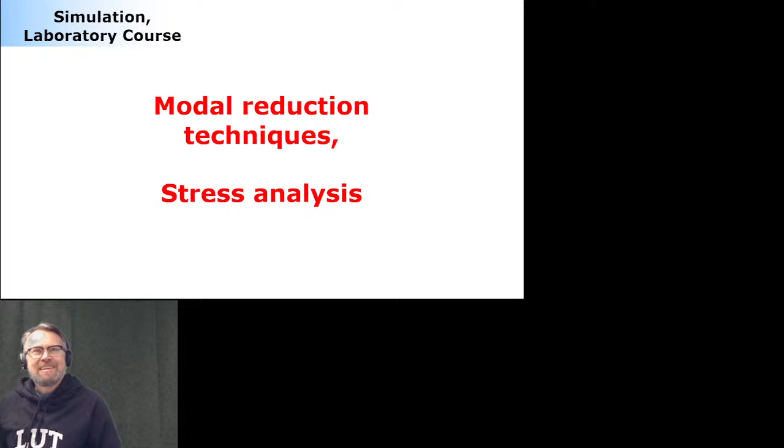It's a name day, it's like Patrick's Day, Saint Patrick's Day, and Saint Aki's Day. Is it? Also, there's another important day today. Today the day and the night are equal in length. Yes, today is the day. So we are approaching the time that the daylight becomes much longer than the night. That's fantastic. The next six months is going to be great. Too much energy.

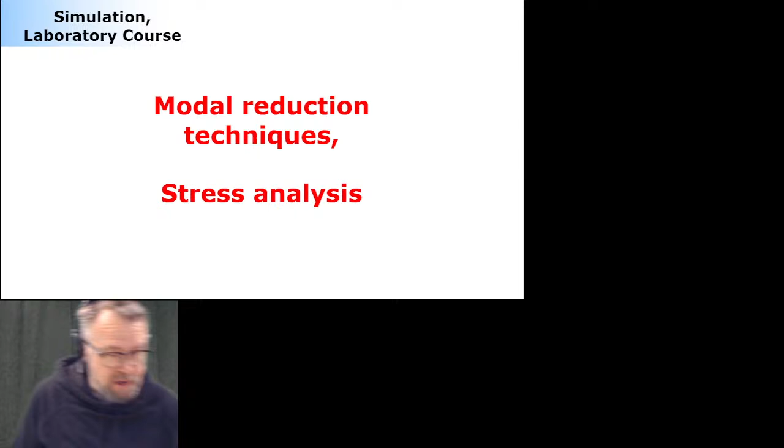Oh yeah, so it's going to be a little bit unpleasant because there's no way to highlight anything on my screen, because my screen here is completely empty.

Core of modal reduction is to move from nodal space to modal space. This is what it is. It means that we need to start looking at the structure that we're modeling using the finite element method as a structure as a whole. Then what we're going to do is look at certain properties of the structure, just like what are the ways that structure can deform. Now these ways are something that we're going to use as a modal basis. This will be the one that we know can deform in this way.

How much? This is going to be something called modal coordinate, which is an amplification of a certain deformation way. What we're going to do is simply move from these points, which is a nodal space, to entire deformation modes. Using these amplifications, we can reduce the size. Of course, with every single reduction method, we're always losing a certain amount of accuracy, as is the case with modal space as well.

But this is better than reducing the size of the original finite element model, because remember, in the finite element model, you need to make sure that the model is converged, meaning it has enough degrees of freedom that it can predict deformation accurately. This is something that we must have.

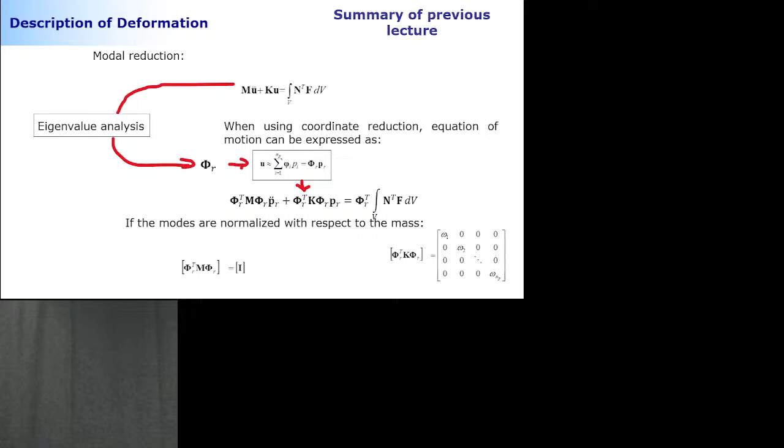All right, so what we do then is move from nodal degrees of freedom to modal degrees of freedom, and what does the mapping is this deformation mode. Now what you can see here, this is a matrix - this one here, Phi, is a matrix that includes numerical values representing the way the structure can deform. It has an equal number of columns as the number of possible deformation modes. Each of the deformation modes is multiplied by an unknown amplification factor that here is called P.

Now, if this possible deformation mode is selected based on eigenvalue analysis, then the deformation modes are orthogonal, meaning that they are not dependent on each other.

They are completely independent. That introduces another significant benefit for us. When you're reducing the size, you're also getting rid of the components that are coupling the different degrees of freedom together. As a consequence, your new mass matrix and stiffness matrix are diagonal in shape, only the diagonal components. And the diagonal component is such that you can select any degree of freedom you want and solve it, knowing nothing about the others.

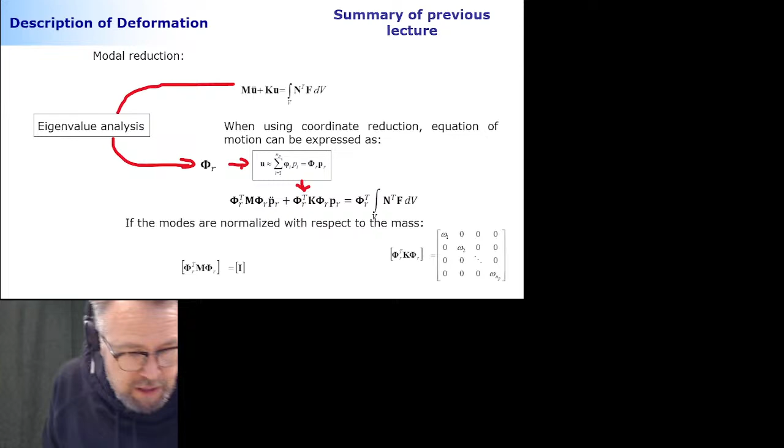That's the beauty. This holds only if your modes are orthogonal. Only in that case. So the common way, or one way, to solve these possible deformation modes is to conduct an eigenvalue analysis.

As a result of eigenvalue analysis, we get two sets of results. The first set is eigenvalues. This is a natural frequency, which is typical for the structure you're looking for. Each structure has a certain number of eigenvalues. Actually, in real structures, there's an infinite number of eigenvalues.

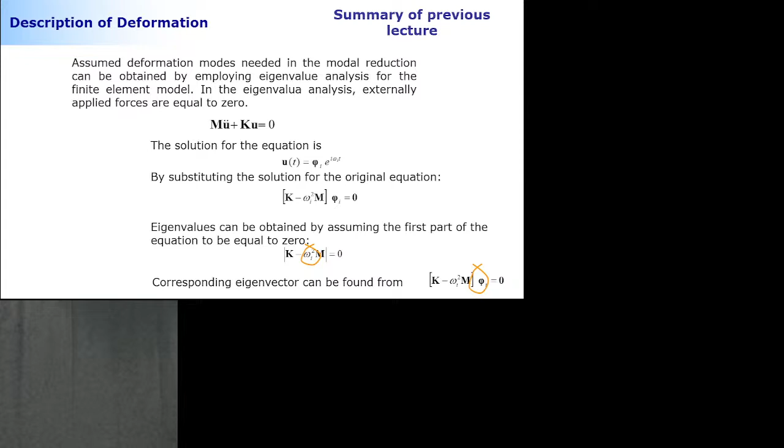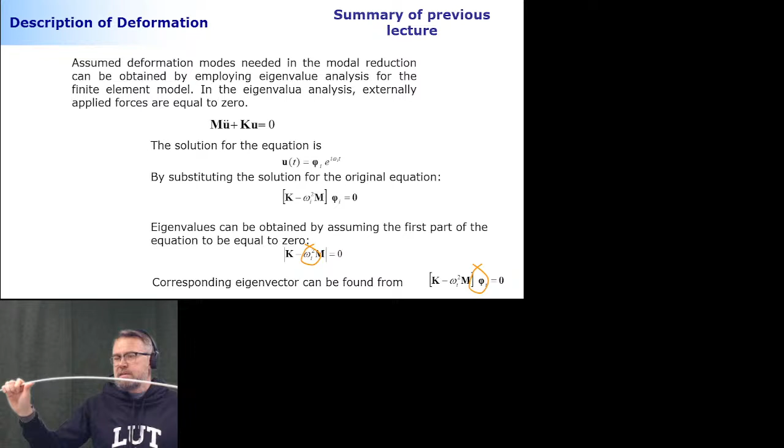There's an infinite number of ways that the structure can deform, because mathematically a structure like this beam consists of an infinite number of particles. Each particle in a flexible body could move its own way, so there's an infinite number of ways this can deform. This isn't possible to capture using computer simulation, because we need to do something called discretization—reducing this infinite number of possible deformations and particles to something more reasonable for computer simulation.

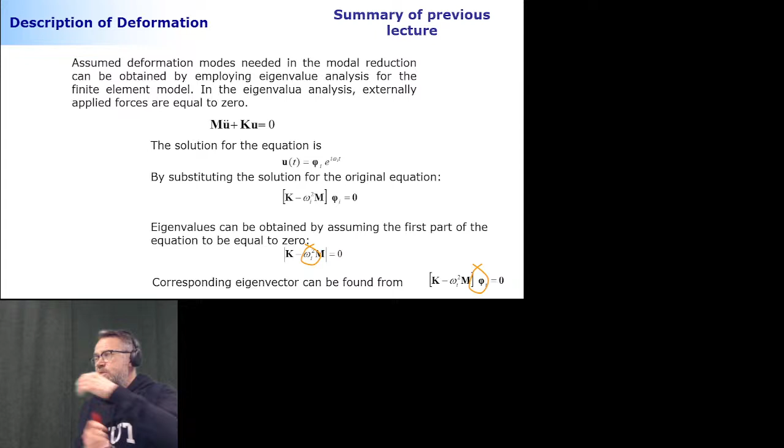So we get these eigenvalues, and the other set of results is eigenvectors. Eigenvectors are the way the structure can deform, and nothing but the way—they have nothing to do with absolute values. It makes me sad to hear people interpreting eigenvectors and making conclusions about absolute deformations based on them, because that's not the case.

All right, eigenvalue analysis. The first thing to understand is that you set your forces equal to 0, meaning you don't even have enough information to draw conclusions about absolute deformations, because the forces are missing. So this is all about the structural properties.

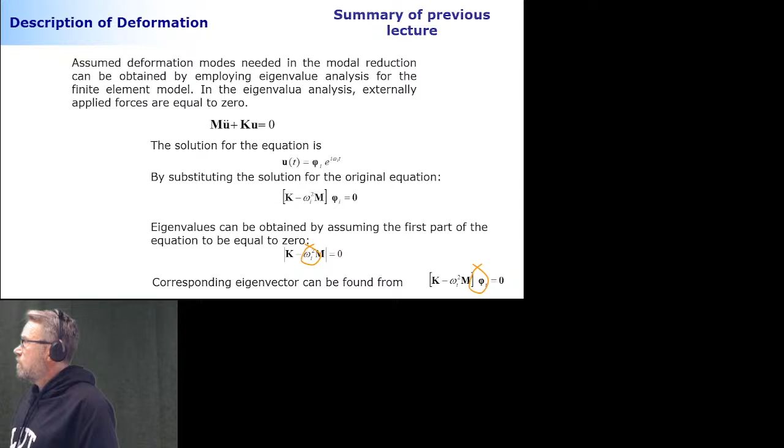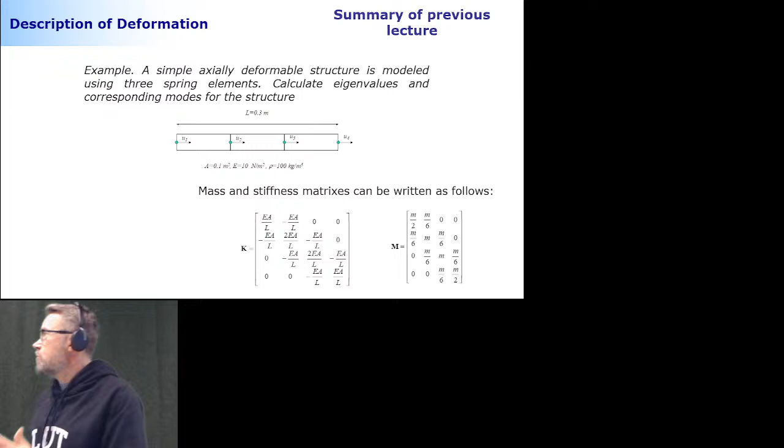We know that eigenvalue analysis has a solution. Once you substitute the solution, you can first solve the eigenvalues, then the eigenvectors, one at a time. So last week we looked at this example: a spring system consisting of three elements, and how we can conduct an eigenvalue analysis. By the way, this is not how eigenvalue analysis is actually solved in practice, because it's computationally inefficient.

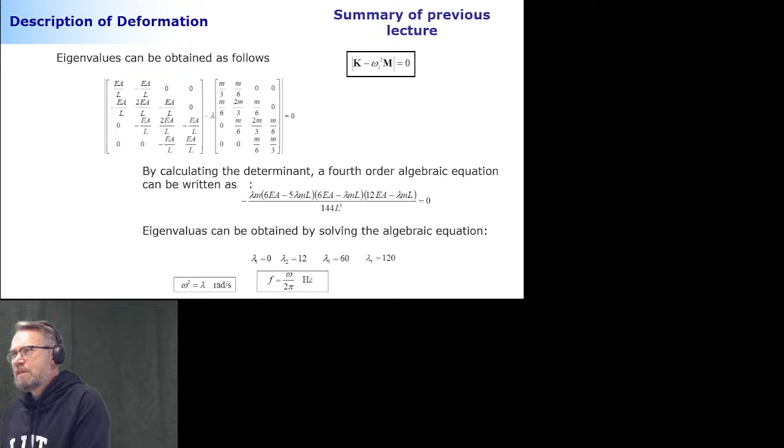We're not able to compute the determinant of a structure that consists of 100,000 degrees of freedom—that's not possible with existing computer power. Anyway, as a demonstration, we're solving the determinant.

We get a polynomial—a fourth order polynomial—and it crosses 0 in four different places. These places are our eigenvalues. These eigenvalues have numerical values of 0, 12, 60, and 120. Zero stands for rigid body motion: no deformation, but it moves as a rigid body.

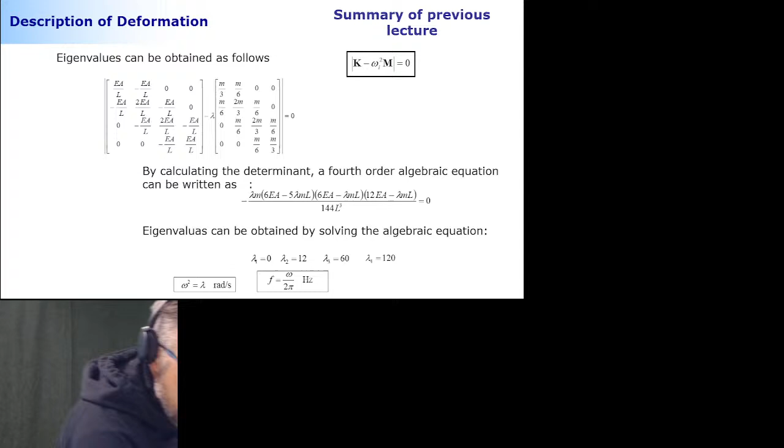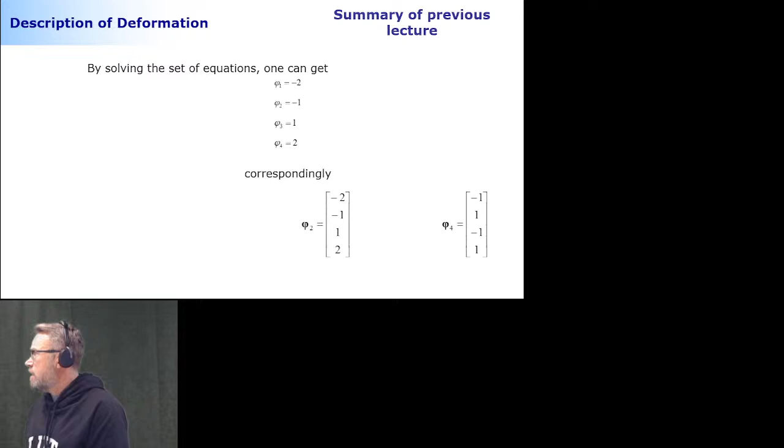Then, one at a time, we can substitute the eigenvalues and figure out the eigenvector—the way the structure can deform. Here are two examples: one associated with the second eigenvalue, the other associated with the fourth eigenvalue. All right, that's what we learned last time.

We also learned this interesting thing: what matters in the end is the shape of the deformation. That's why, in the example about the connection rod, I can get equal responses using two different boundary conditions. The boundary condition in the finite element method refers to how the structure is attached to ground, if at all. The first option for computing eigenvalue analysis is to have no boundary condition whatsoever.

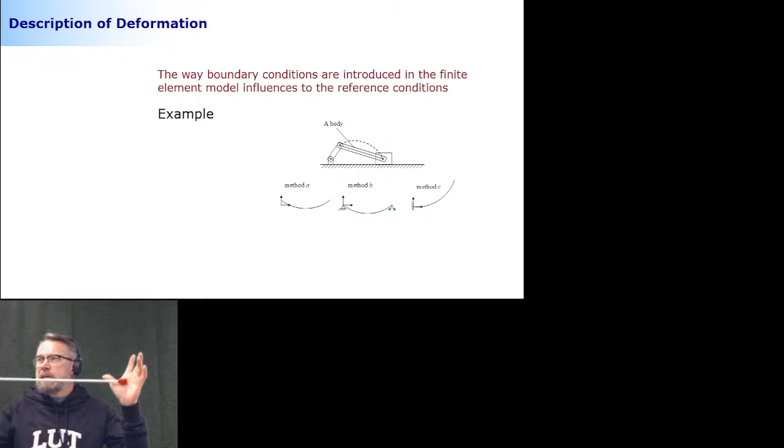This is important to understand, because in this particular case the body reference coordinate system—the coordinate system used in method A—is detached from the material point; it's actually floating with the body. That's what 'floating' stands for. The reference coordinate moves along with the body, translating with it, but as soon as there is deformation, it becomes detached from the material point.

You see, with deformation, when I have this free boundary condition, this standing coordinate system is typically referred to as the global coordinate system in the finite element method. It is detached from the material point.

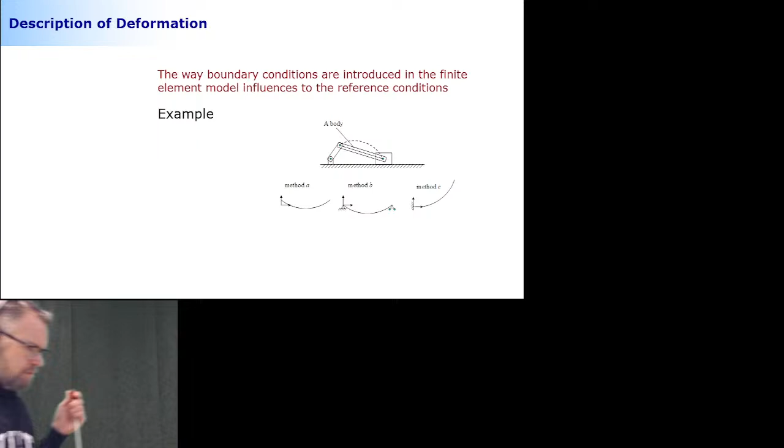And that's where the floating frame of reference formulation is coming from. This possibility that is floating. It's not necessarily floating in all the other boundary condition possibilities, but because of in free boundary condition, it is floating. That's where the name is coming from.

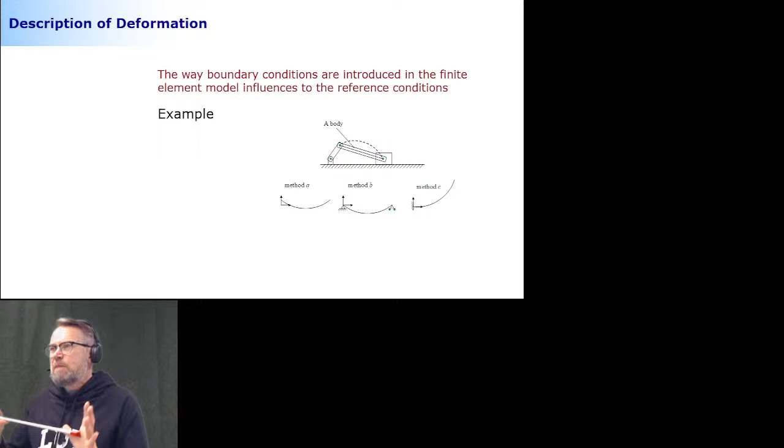So now, if I would ask where the name floating is coming from in a floating frame reference formulation, you know the answer. The answer is that the reference coordinate system is not attached to a material point, and it is unattached in a case of deformation. In case of undeformed translation, undeformed rotation, it is fully attached. But as soon as the deformation comes into play, it is detached.

So how do you think the success rate is going to be in the shortly coming in-class quiz? 85. And I'm seriously going to ask where the name floating is coming from in the floating frame reference formulation.

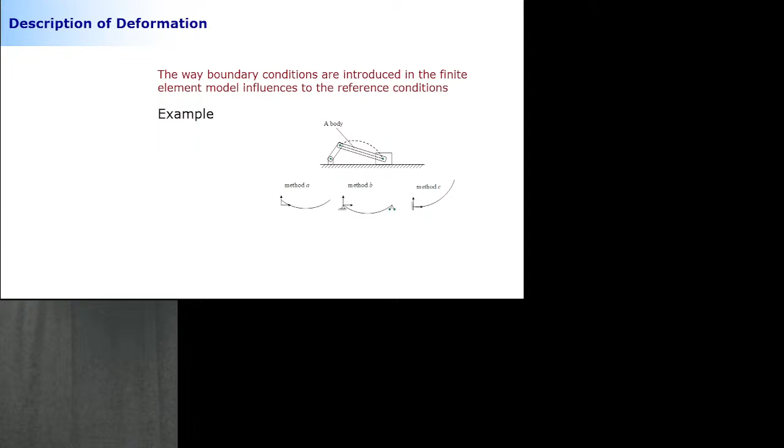Okay, all right. But one more thing we looked at a week ago, two weeks back, was that in the floating frame reference formulation, it is possible that each of these boundary conditions will give you approximately the same response. It's simply because what matters in dynamics is the global motion, the motion with respect to the global coordinate system. And now you can have different roads to your final destination. Each of these reference coordinates and reference conditions represent the different roads. But at the end of the day, you're going somewhere along your beam, and regardless of how you do this, you will get roughly the same answer.

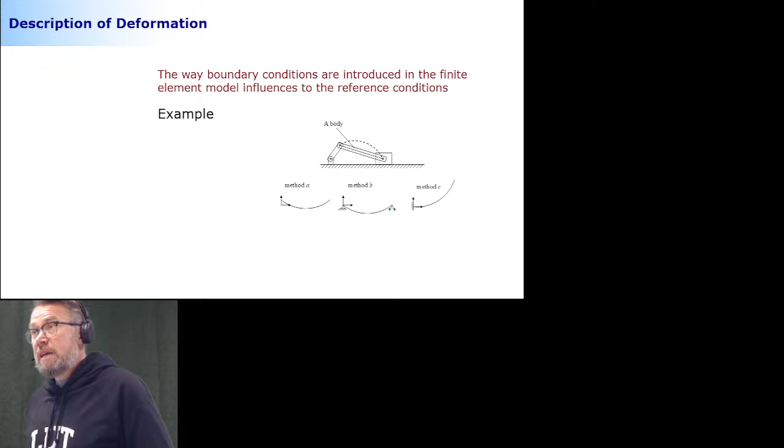Okay, I'm not going to put the quiz on because of the technical difficulties I'm experiencing today, but I'm going to put it on momentarily. Okay, so again, I'm not able to do the drawings here. So now it came back. Is it just that my computer is super slow today? Extend? No, duplicate. Yeah, I'm back. I actually can see something on my screen. So it's no longer completely black. Yeah, I want to do how we... So we're gonna keep it this way. But now how can I get rid of this window? But clicking is not willing to make it disappear. Yep, it disappeared.

All right, I'm gonna put this on momentarily. So I'm asking what the floating means in the floating frame reference formulation.

It means that the formulation is still under development. Titus? Okay, it means that the body inertia can fluctuate. Body inertia can fluctuate. Okay, it means that the strain within the flexible body can be defined easily. It means that the body reference coordinate system can move away from a material point of a body.

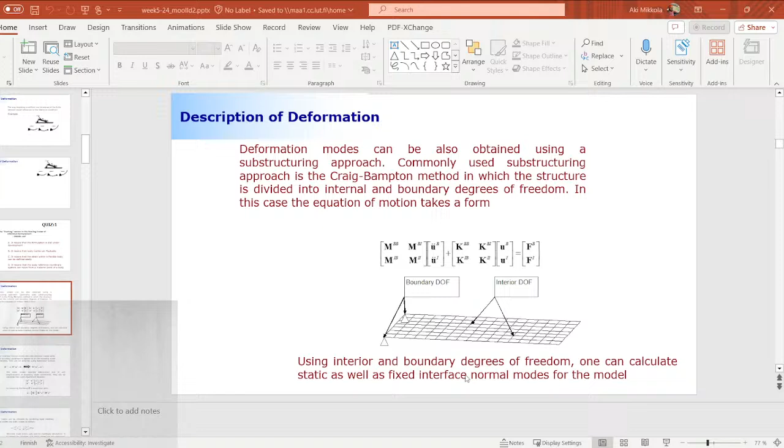When I'm changing the slides, it's not changing on my slides. How come it's not changing? What slides are we looking at? Can you take a look, how is it on YouTube? Why not? This is a weird problem.

Extended, and then display the extended one. So it's extended, and then I'm going to put this screen. So I'm going to use a window capture, and then display the whole screen. But this is so weird, because if you look at my screen, this is looking so weird. I have this one here, this is like a screen in this one. Yeah, of course. You can double click that, these are the choices. No, it's not willing to do it today, because this was the problem in the beginning. We can, but this should be transparent, so it's not making much of a difference.

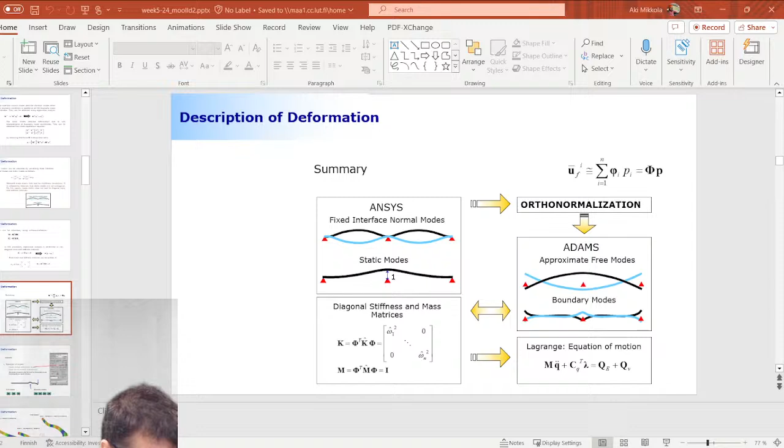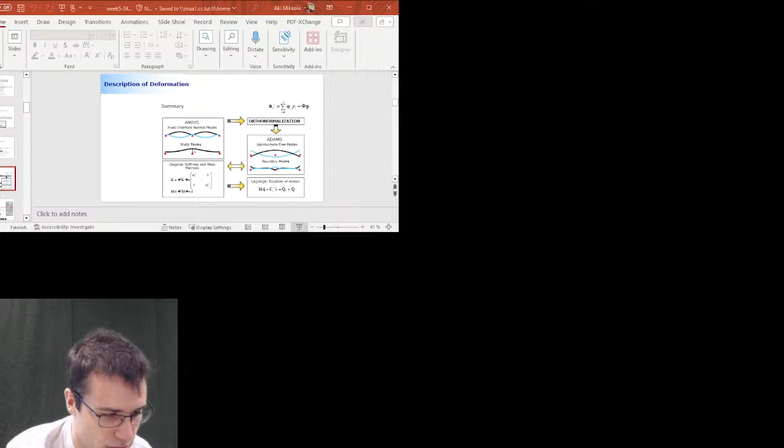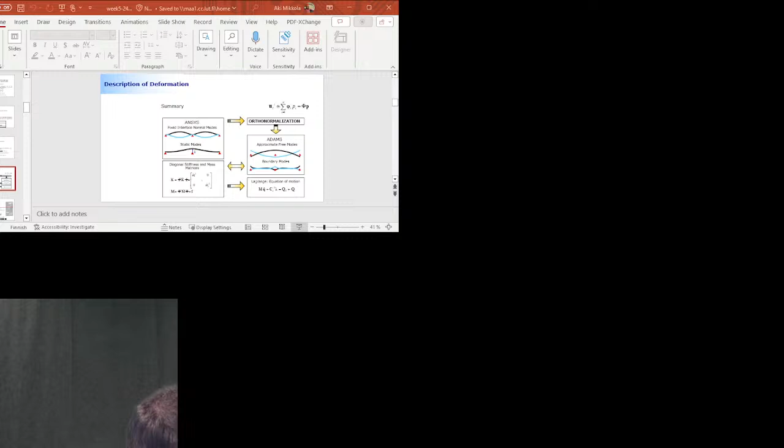Okay, that disappeared. So then if I use display, this - yeah, here, this one. Yeah, there, like this one, can I? Yeah. Can you? And then we say this one.

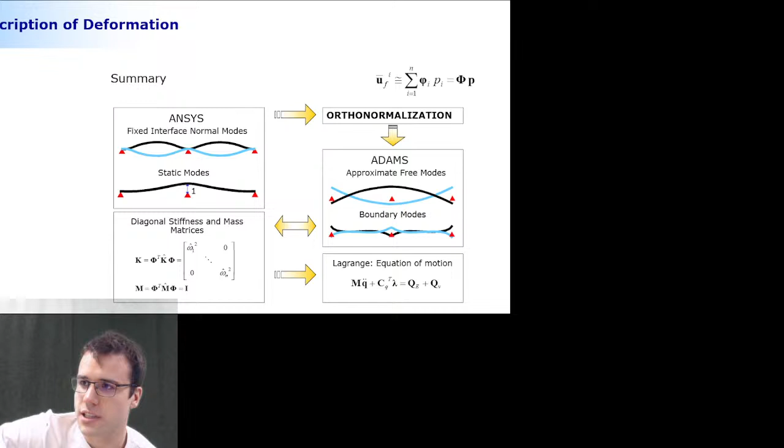Yeah, it's going to be one quarter of the screen, but that's simply because of... is it? So how is it? But there's nothing we can do about that today. It's almost looking like somebody's using my computer. Yeah, there's some kind of update, because you notice somebody opened a window - it's like somebody's using my computer. Seriously, I think IT can use it if they want, but I don't know.

Yeah, okay, all right, so let's close the story. So this is a summary.

So again, you first select your nodal degrees of freedom, dividing them into two categories: boundary degrees of freedom and internal degrees of freedom. Then you conduct an eigenvalue analysis for internal degrees of freedom, leaving the rest fixed to ground. Then you can introduce static correction modes, which you get by introducing unit displacement to boundary degrees of freedom one at a time. This combination would be okay, but the beauty mistake related to static correction is that they're not orthogonal.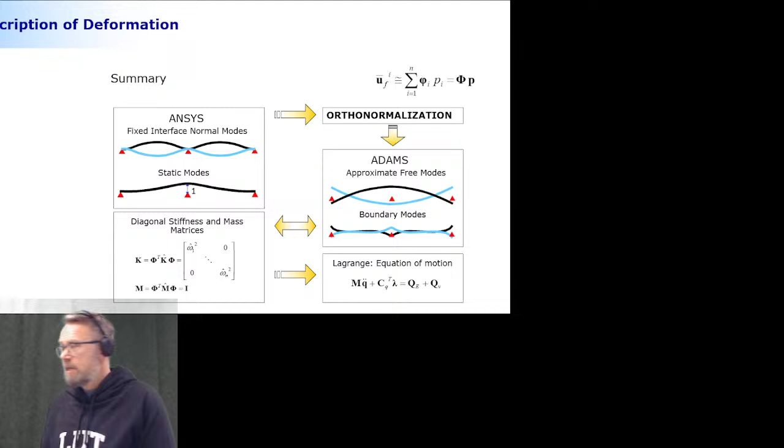I'm going to introduce these boundary modes and the free modes to you. So the free modes are looking like this. Is this still okay on YouTube? I guess it is. So these are the free modes. You see that this is one of the low frequencies in the free modes, but the deformation is in a transverse direction, so probably not very important for us. Okay, this is another deformation, but again in line with the loading, so probably something we need to keep in play.

So these are the deformation modes, and these are the free modes. These are the boundary degrees of freedom. You see that some of the boundary degrees of freedom are not making any sense, like the one we looked at earlier. And also take a look at the frequency, extremely high frequency. You have no chance to compute anything at this high frequency because if you really want to capture this, you should use a time step that is extremely small. So most of the boundary degrees of freedom are something you need to be careful with. You probably don't need all of them. Some of them you might, but some of them are just introducing overly high frequencies to your system.

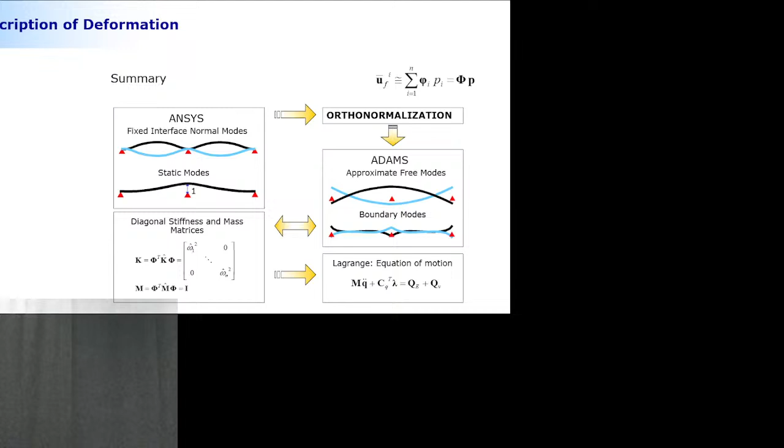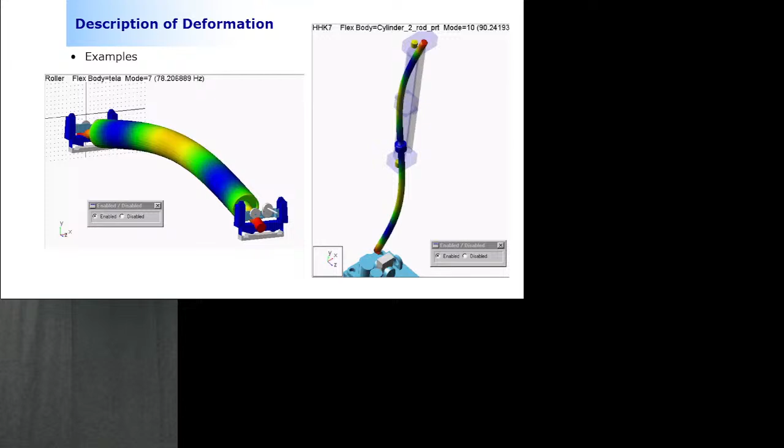So it's still not sharing. Okay, so if I do this one, this one... what a big pain. Yeah, here. I don't know, I don't see how OBS is... Is it making any sense? Okay, what a major disappointment. Every now and then I'm thinking I should leave the YouTube streaming, but I'm a little bit reluctant to do so because despite all these technical difficulties, it's still a really nice tool to watch lectures afterwards because of the subtitles and everything.

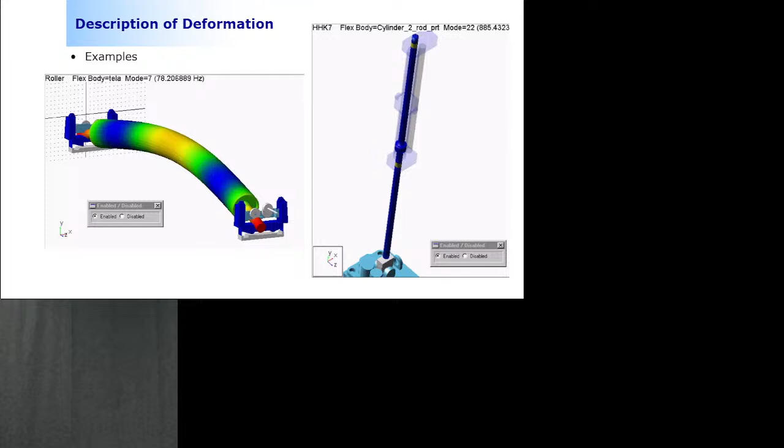I don't know if you guys put the subtitles on. Every single time I check how my recording was, I put the subtitles on, and amazingly it's able to understand my English completely. Here and there it goes incorrectly, but in most cases it's correct, absolutely correct. And that's weird because of the accent and everything. Yeah, but still, accent and everything, it's still capable of writing it correctly. That's weird. It's amazing, I would say.

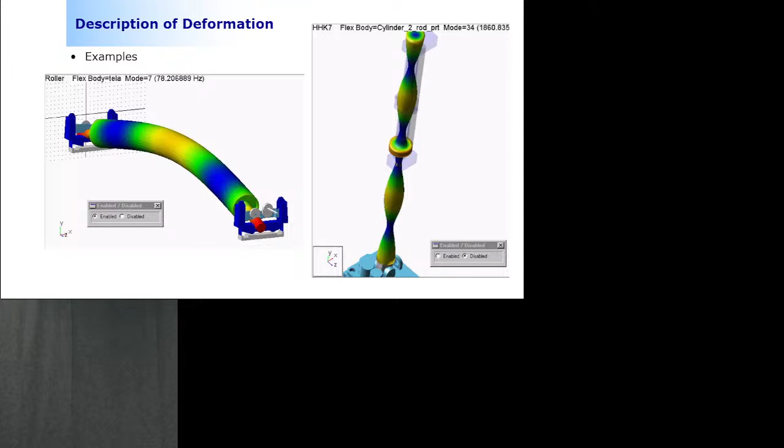But again, subtitles, you guys know you can change the subtitles to any language you want, even Finnish, if that's what you want. German, no problem. Have you tried? It works well. I mean, it's not as good as English, but it's understandable. For sure it's understandable. You know there's a big debate going on in Finnish universities about whether we should stop teaching in Finnish and have everything in English. And of course there are people heavily against it. It's just that there's a practicality related to this discussion: if I explain this material two times, once for the Finnish class and once for the English class, it's going to be double the amount of work for me. So to define the energy minimum, the good way is to just explain in English, and then for subtitles, use whatever language you prefer, and it's okay.

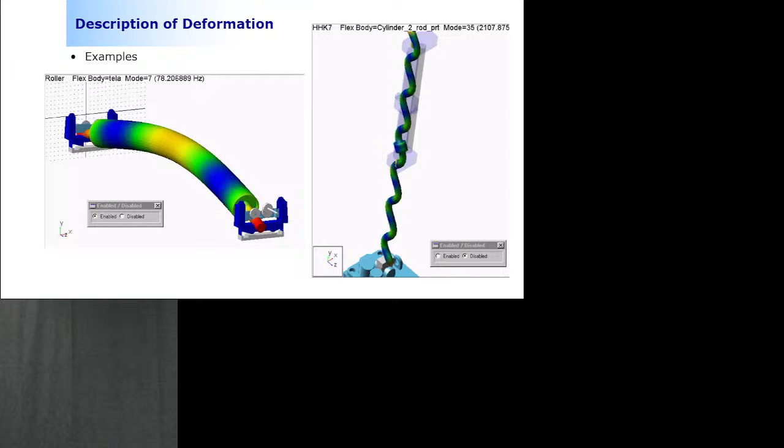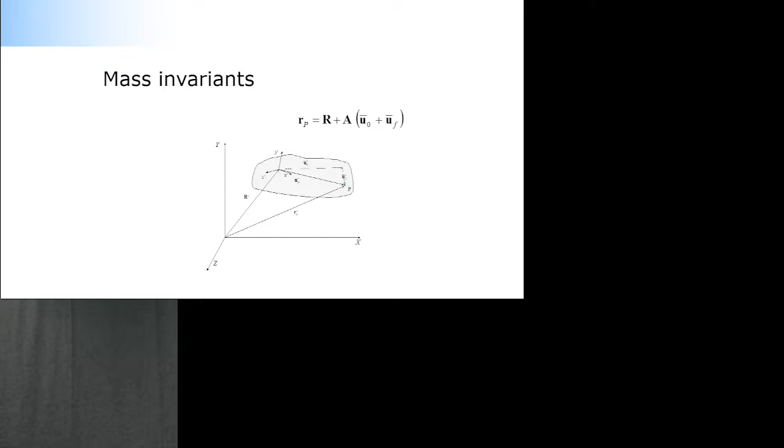This story is such that these flexible bodies and the reference motion... let me get started again. Remember when I was introducing the floating frame reference formulation, I said that this is a combination of two methods, finite element method and multi-body system dynamics. As it is, this is the right kind of way to introduce the method.

Now these two methods, finite element method and multi-body system dynamics, can be coupled one way or another. This flexible description needs to be coupled one way or another. There is a possibility that you do the coupling using your stiffness matrix. In a floating frame reference formulation, the coupling is made by using inertia description, mass matrix, and quadratic velocity vector, meaning that these components associated to inertia can look very bad because the coupling terms are located to this part of the equation of motion.

By making another kind of selection, coupling could be introduced in a stiffness matrix, and when doing so, the stiffness matrix is going to look very bad, ugly looking, messy, complicated. But always in the floating frame reference formulation, the coupling is through the mass matrix. Now here comes the story.

The mass invariants are the components that define how tight the connection is. This is kind of weird, but most commercial software gives you an opportunity to define whether this coupling is fully coupled, partly coupled, loose coupled, or no coupling. I understand these are two extremes: no coupling and full coupling come with clear benefits. With no coupling, you can run your system as rigid bodies, check how well it works, and see if the constraints are correctly made, and so on.

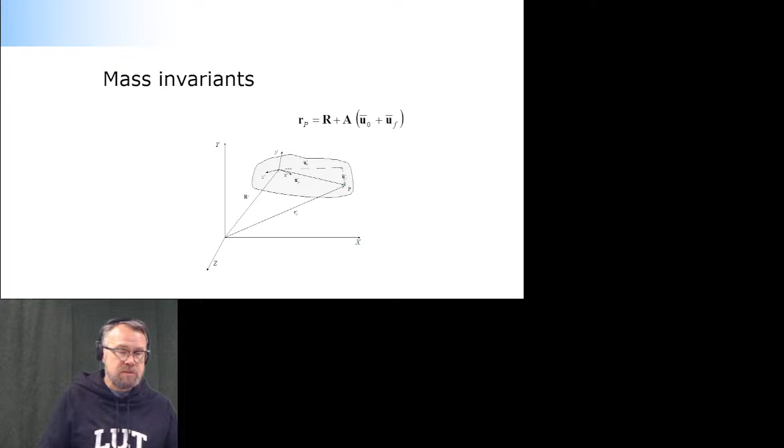These coupling terms are called mass invariants, and they come from the expression of inertia forces, components that are mass and the quadratic velocity vector. Most particularly, what is important is the mass matrix. It all gets started from this kinematic equation displayed in my slides. I have here the deformation U bar F that we describe using finite element method. When you're using this notation and deriving your elastic forces based on that, something that appears along the development is the mass invariants.

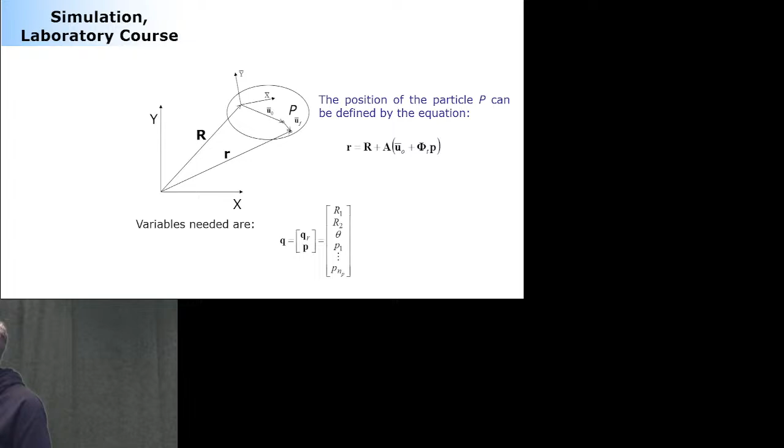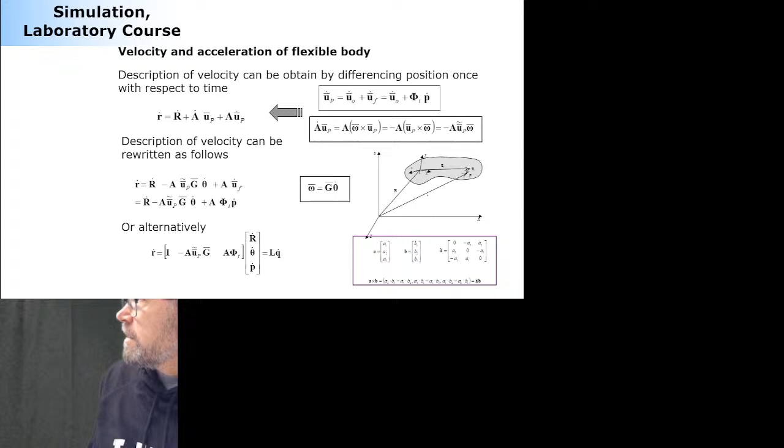This is the kinematic notation when you're using modal degrees of freedom, and your variables are listed here: they have reference motion and the deformation. Once you're using this information and you advance in your definitions and computing, you can compute velocity and acceleration. They all gonna look very, very bad, very nasty, because of this deformation.

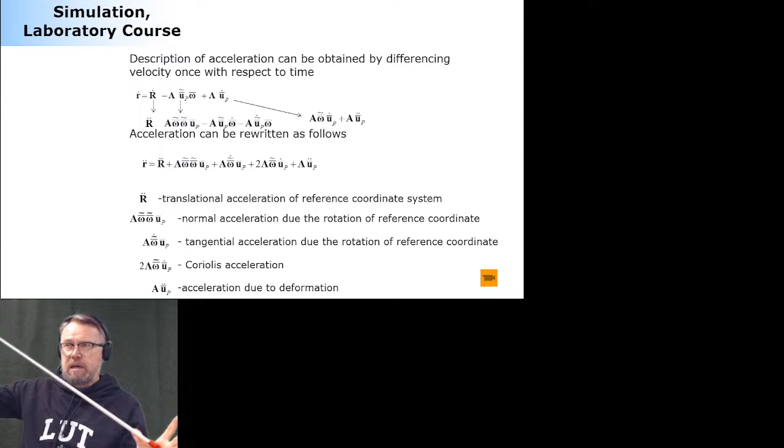And now we actually have something we didn't have in the case of rigid bodies, and that's Coriolis acceleration. Because now it comes into play: if you have a beam-like structure in this rotating coordinate system, it's possible that a particle is moving with respect to the rotating coordinate system. That's the definition of Coriolis acceleration. That happens in deformable bodies.

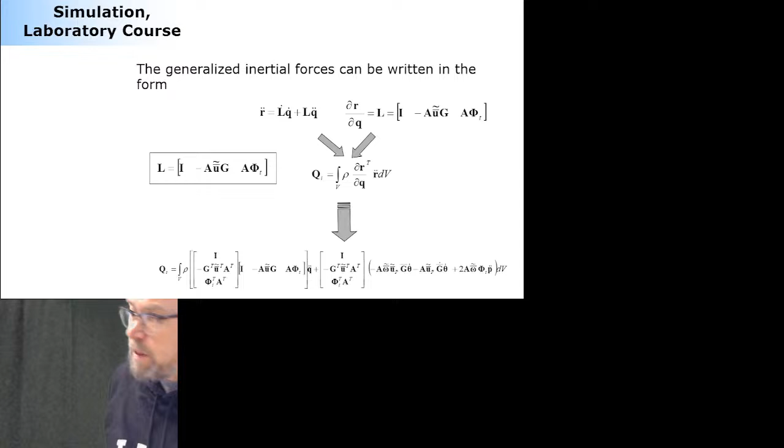Now, these are the components of acceleration. Once you substitute all these into the expression of virtual work for inertial forces, what becomes built into the equation is a mass matrix, an enormous mass, big mass, very big mass.

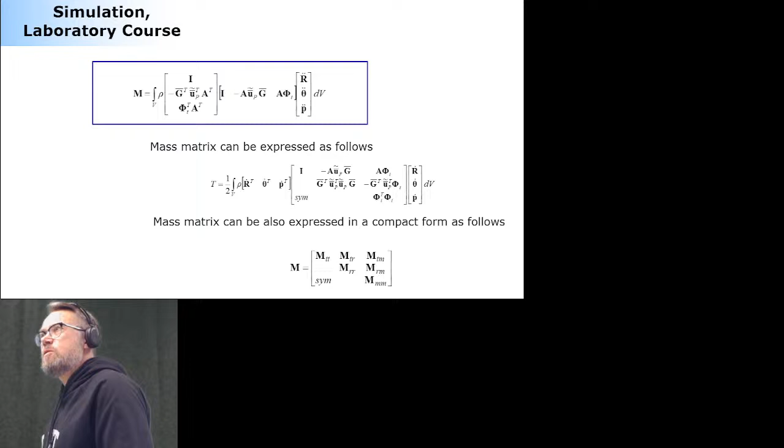But some of the components in a mass matrix you can compute in advance. The ones you can compute in advance are called mass invariants. They are associated to these 6 components of the mass matrix, and they are denoted as I1 to I9. This is how you compute them.

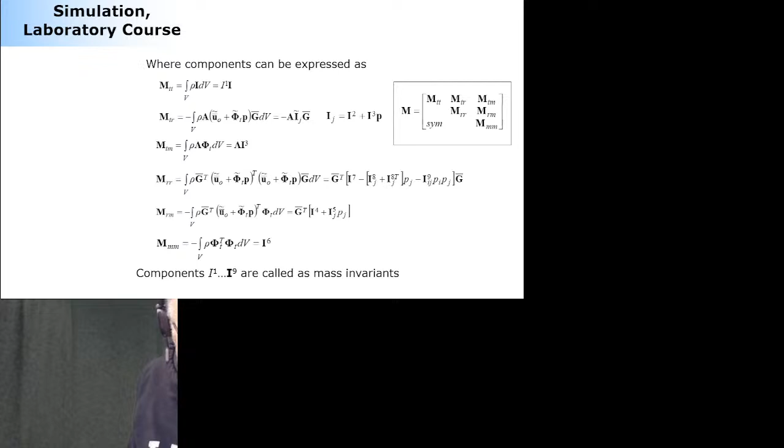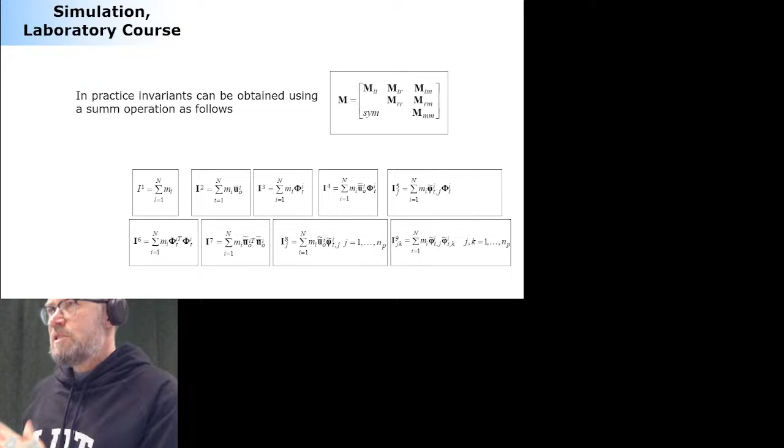The weird part of this story is this: the user can define which of these mass invariants are part of the computation and which are not. If you keep all of them in the computation, you get absolutely fully coupled, correct solutions, but very slow computing. If you give none of them in play, you get rigid body motion, which is very efficient. If you give some of them in play, you get something that is unclear.

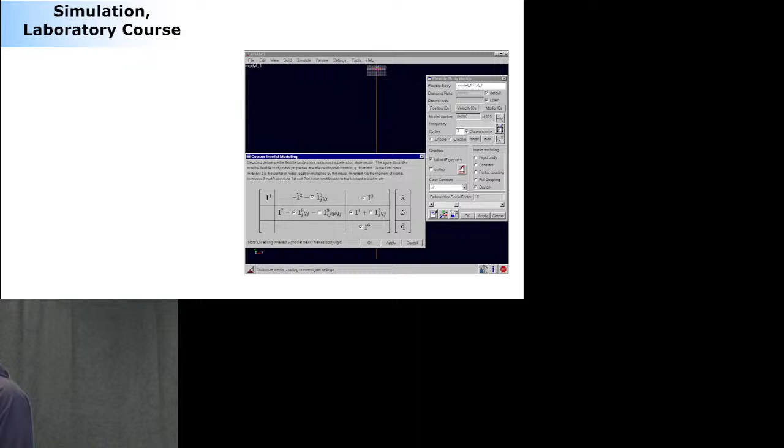This is how this is displayed, or this is the user interface in the software. You can see that you can click to put this on and off as you please. My recommendation: don't play with it, because this is like playing with fire. You can easily burn your face. Don't do that.

Okay, that's it. Now one more story, and then we're going to close today. I mentioned to Mustafa that in 10 minutes we're going to close this thing. Okay, stress analysis—stress analysis based on multi-body system dynamics.

This is a very important post-processing procedure, something that actually comes with big value. Being able to define the stress history in different locations of your structure is something you can use to define many important things—not just the static dimensioning of your structure, but something more fatigue related. And fatigue is important.

The current trend is that companies are looking more and more for opportunities to use high strength steel, because it makes it possible to design more slender, lightweight structures. Weight is important, because if you have a lightweight structure, you're using less material. As a rule of thumb—this isn't exactly the case, but as a rule of thumb—you can measure the expenses based on the weight of your structure. If it's very heavy, it's probably more expensive than a lightweight structure.

Lightweight design comes with many other benefits, including the fact that if you build mobile machinery as lightweight as possible, your energy consumption goes down. The damage you introduce to nature—if you have, say, a forest structure—will be less. And you kind of must do it, because there's another trend working against this lightweight design.

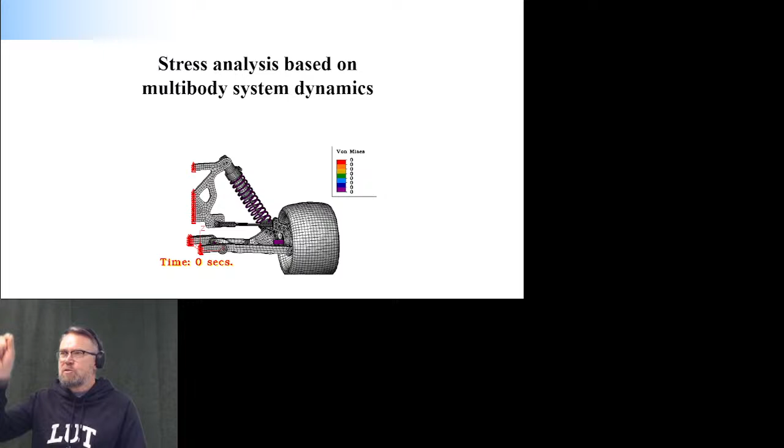So how much does it help if we change to use a high strength steel instead of conventional steel? It's going to make things worse. Why? Because the residual stress is always going to be at the point where this linear strain-stress curve is moving to be nonlinear, so it's always that high. So whenever you are loading your structure, the crack starts to grow there. And now when you have a slender structure, the dynamic loading is more significant, so it's an even bigger problem than when using conventional steel. So those are the trends.

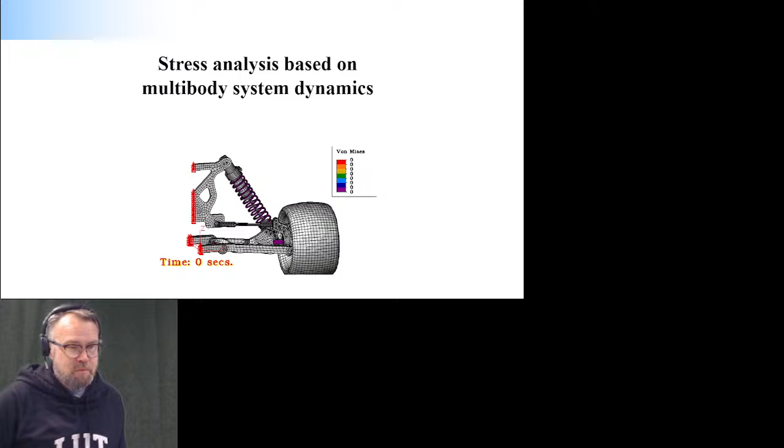All right, so how is it that we can get these stresses out? We have two possibilities. One is a no-good possibility, but still is a possibility.

What we can do is use a post-processing procedure, taking all the forces, including inertial forces, from our multi-body software and transport those to finite element software, pretty much where the original finite element model was located, and then using a lot of pre-processing. This time it's not pre-processing in a finite element method, but the loading cases, as many as a time step in your multi-body model, to figure out the deformation again, not the degrees of freedom again. You already have this information once, but now you do it again.

This is one possibility. Another possibility is using the properties related to your elements to compute strains and stresses directly using your modal coordinates. Very sophisticated, very nice, but not necessarily always available, because it needs synchronization between the different software. So that could be a bit of the problem.

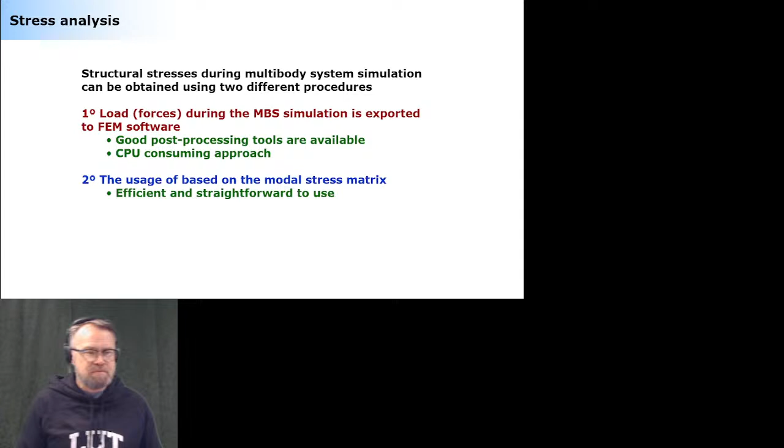Okay, so these are the two ways. The first way is this: you have your structure, you analyze it using your multi-body system dynamics, you get the solution with some number of time steps—1,000, 10,000, 100,000. You're creating the load cases based on each of these time steps. You're exporting them to a finite element model, and then you keep on solving them.

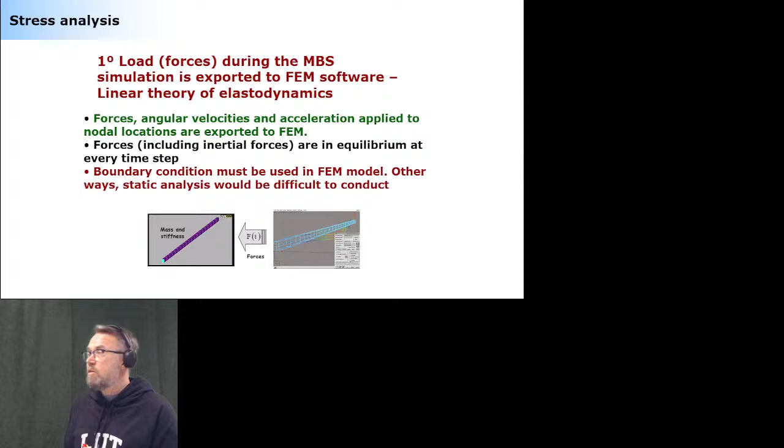Possible, but very inconvenient. And you can easily make a mistake here too, because in a finite element model you must have a boundary condition. It's not going to be in balance if you say here are my forces, my dynamic forces, they're in dynamic equilibrium—compute the deformation. That's not going to work out in finite element modeling; you need to introduce some boundary conditions. And these boundary conditions may fight against the deformation, introducing artificial strains and displacement, which is a completely incorrect way to go. But theoretically, this is one possibility.

And again, it could be the same model that you're using to extract this information you need to describe the deformation. That's possible, but this doesn't make much of a difference.

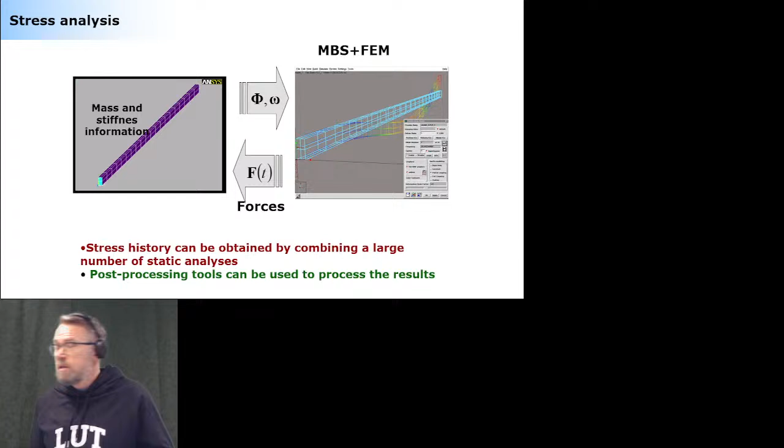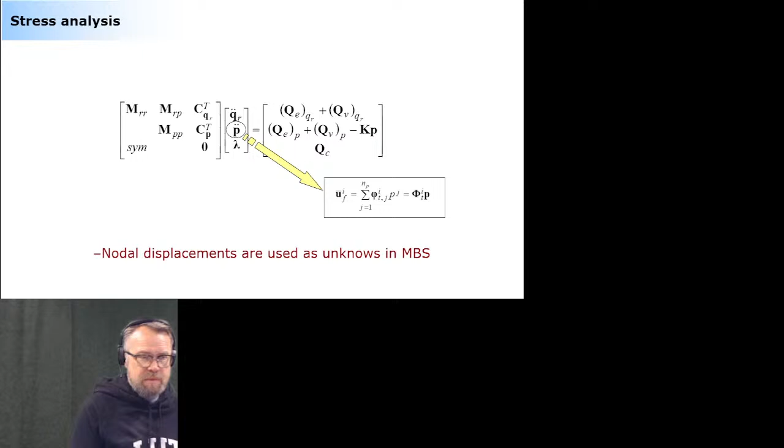A better way is this: you know, unknowns when you have the floating frame reference formulation are modal coordinates. Modal coordinates are associated with your nodal coordinates with the help of this deformation matrix. So let's go back to the nodal coordinates. The nodal coordinates, like we learned in the finite element model, are connected to strains via a kinematic matrix. This kinematic matrix is associated with each of the elements. So we can identify each of the elements here using the kinematic matrix, which is matrix B.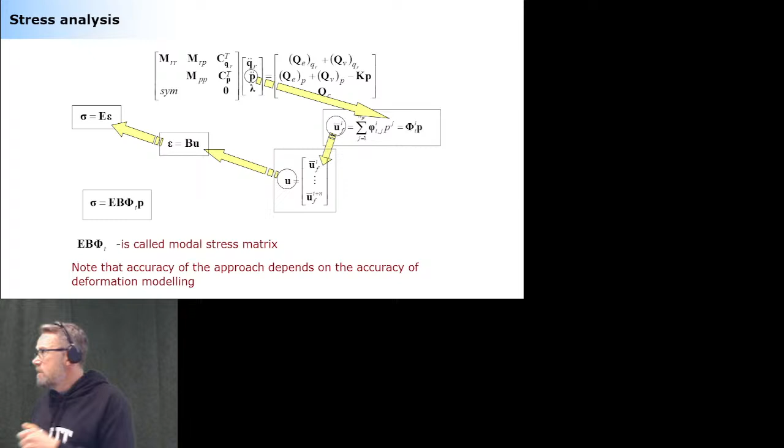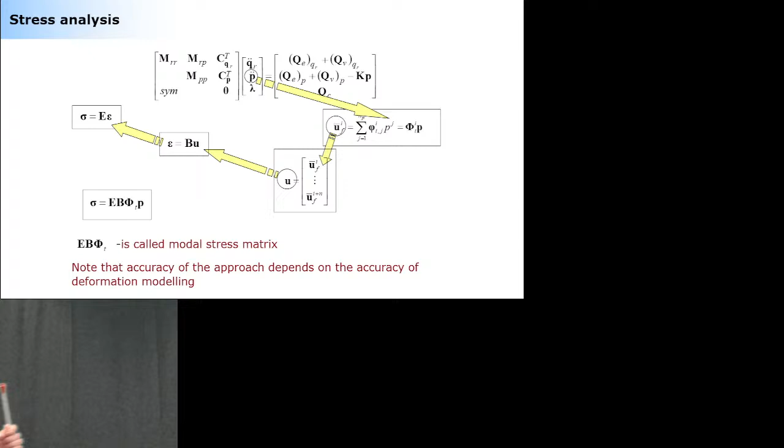You can get strains, and then when you have a matrix of elastic coefficients, you can get the stresses. Combining everything into one package, it's called the modal stress matrix. This automatically gives you access to stress histories within multi-body system dynamics. So that's an alternative. All right, here are the drawbacks and positive things.

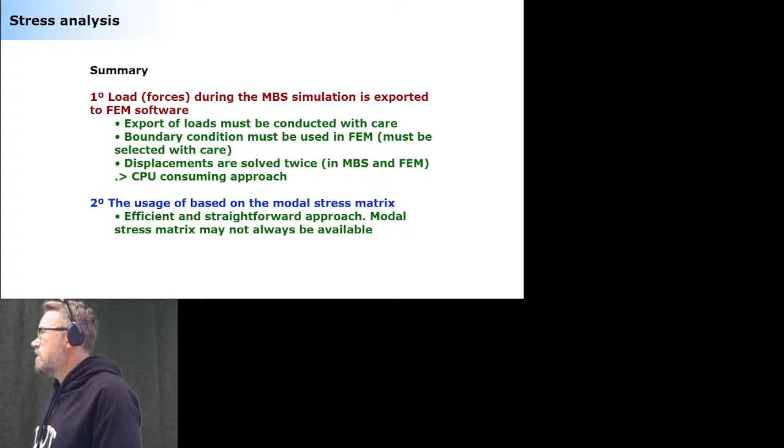The first option, this whole exporting business, needs a lot of manual work. You need to be super careful with that. Boundary conditions—you must define them, and typically it's extremely hard to do correctly. And solving your displacement twice makes no sense. The other option is efficient but not necessarily always available. But wherever it's available, please use option number two.

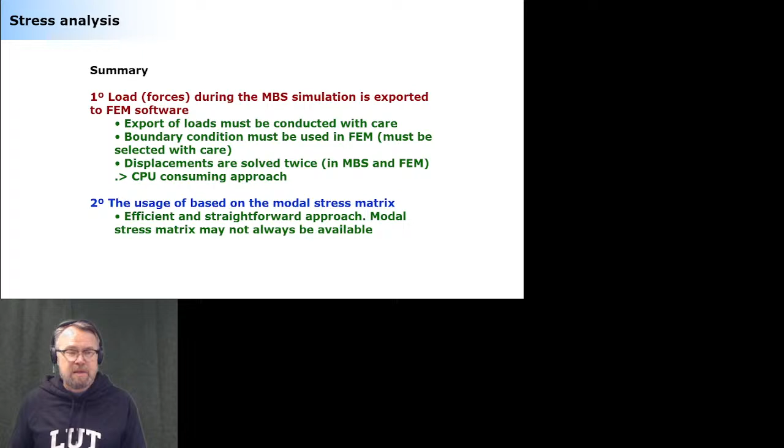Okay, the next story would be fatigue, and exactly like I explained, we do the fatigue analysis. I don't know if you've been in a fatigue course already. No? Okay, so you haven't been in a fatigue course. So correct me if I say something funny.

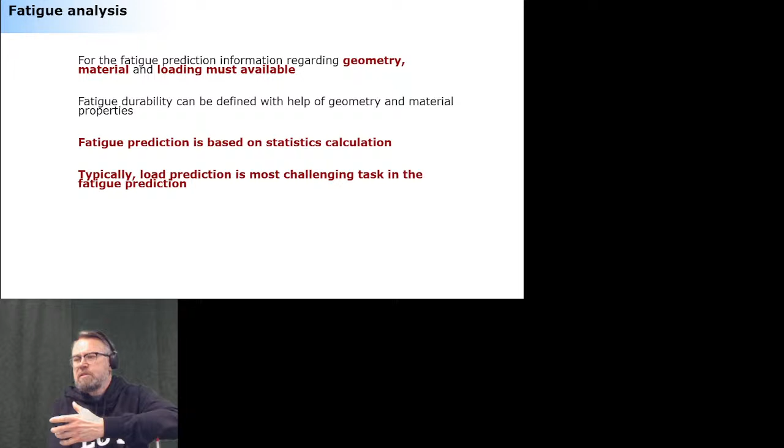The fatigue in fatigue analysis is different depending on whether you look at welded structures or non-welded structures. They're conceptually very different, not much relation, because non-welded structures is all about crack initiation. If you see a visible crack in your car engine's connection rod, better replace it, because the lifetime left is not much. Whereas in welded structures, it's all about controlling the crack growing.

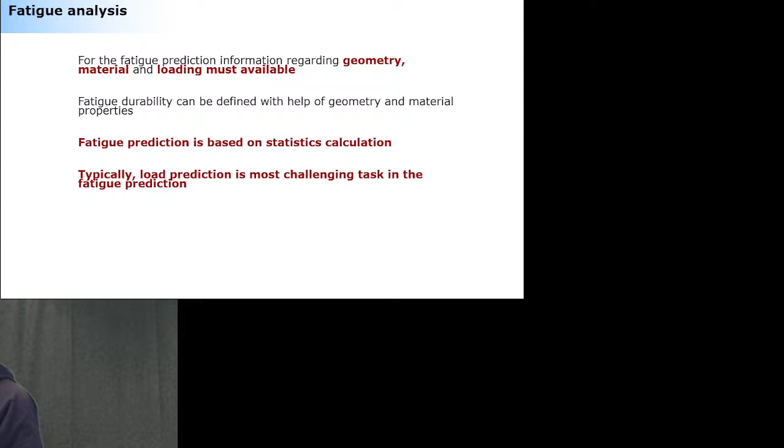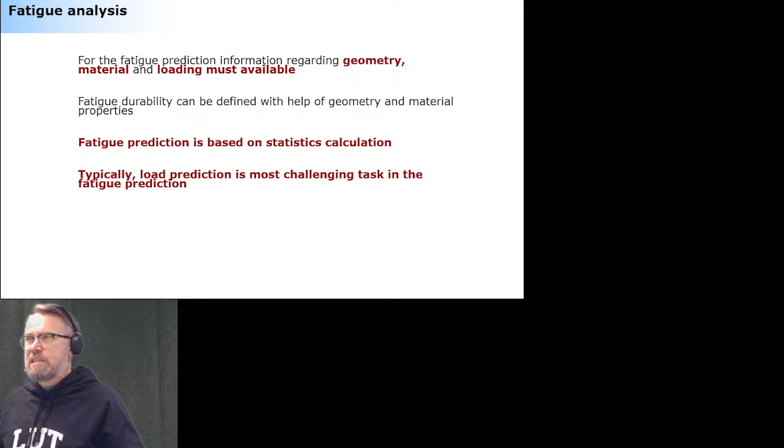Fatigue is a statistical thing. Even though we get a clear number out from it, it's still with a certain probability. We cannot say that when this amount of hours is done, your system is absolutely failing - it's not going to happen like that. But we can say statistically, this and that amount of structures will have damage after this and that amount of hours. It's a statistical thing, the things are statistically distributed.

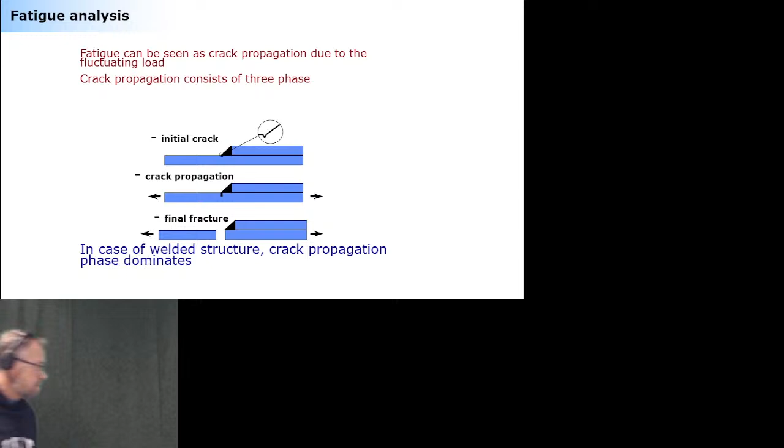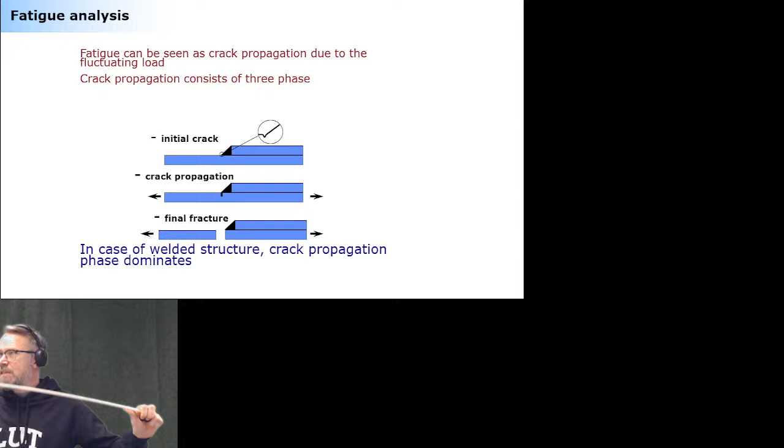I don't want to show how the nonlinear is, but nonlinear means that you go to the nonlinear phase. You take your loading off and you're no longer coming back where you started, but you come back in a deformed form, meaning your structure is bent, which is not great - that's not going to look good. So typically machines are operated in this linear section.

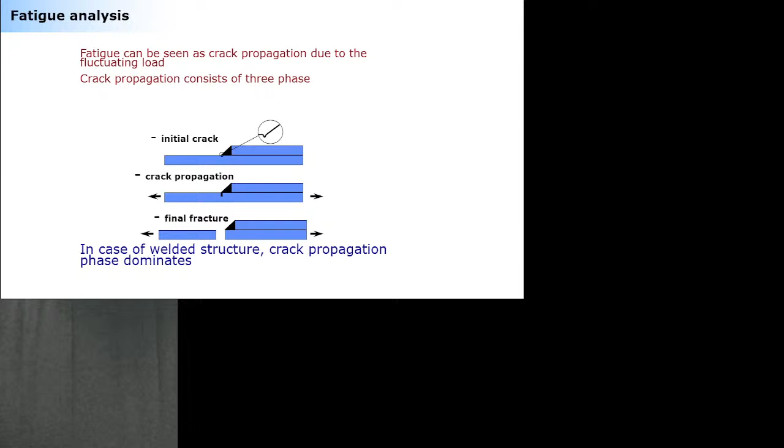Now, like I said, the problem in the welded structure is that very locally, because of the welding process, the stresses are located right at the corner where the linear is moving to be nonlinear, always. When you start loading, introducing strains a little away from this point, you're going to automatically move the plastic zone locally - that's where the crack is growing. There's also a geometrical nonlinearity, typically increasing the stress rate locally - a very local thing.